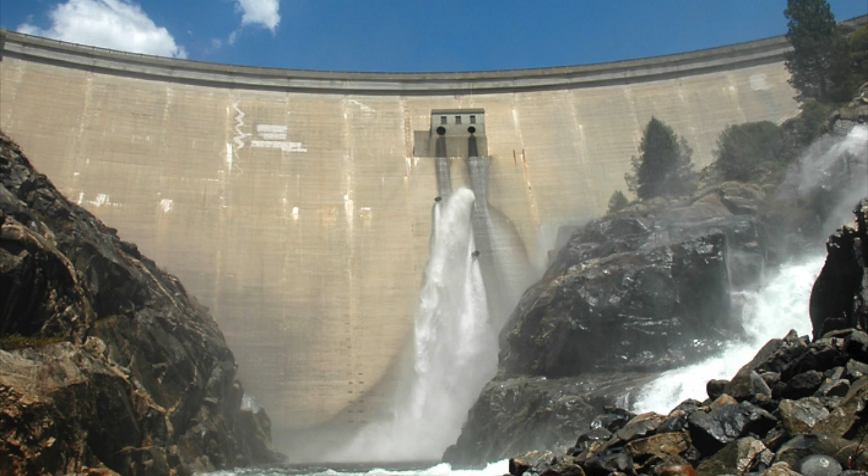Fun thing about being a civil environmental engineer, specializing in water, is that each day is unique. My typical day involves working on projects for towns and cities that hire us to help run their water and wastewater systems. This means that most days usually fall into one of four roles based on project work.

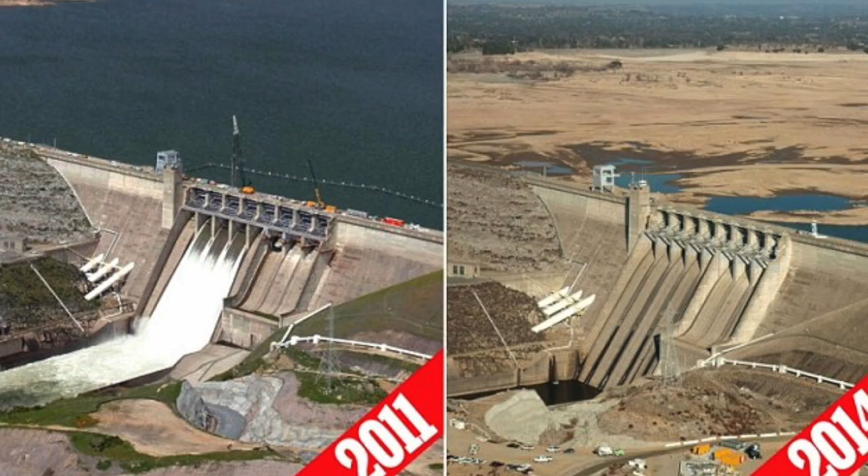Some days, I may be working in the infancy stage of a project, doing high-level planning calculations and conceptual designs. This is fun because you get to be creative and let your mind run free solving real-world problems.

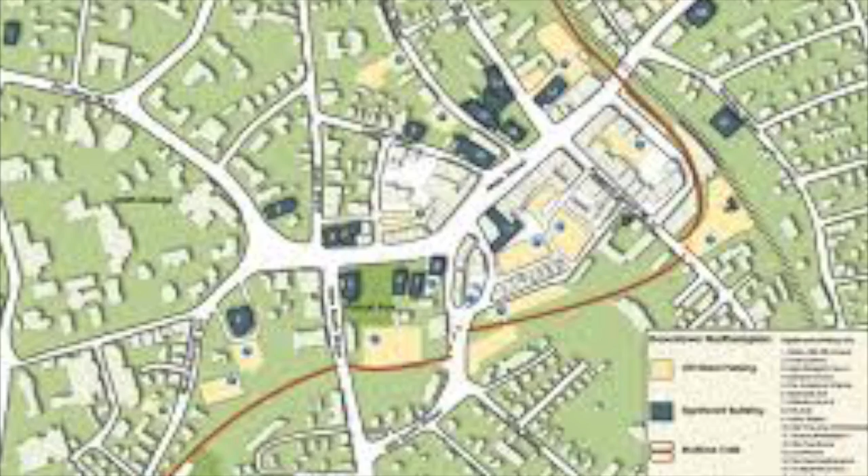Other days, I may be completing final designs with tools such as AutoCAD and GIS. I really enjoy maps and drawing technical plans, so I kind of feel like a kid in a sandbox doing this kind of work. Once your project design is complete and goes out to bid, a water engineer helps administer the bidding process. This is really a separate phase of the project lifecycle, but only lasts a few weeks, so I've included it with the final design role.

During this part of a project, I'm typically answering questions to clarify design details and getting ready for construction to start. The construction phase of the project is my favorite part of the job.

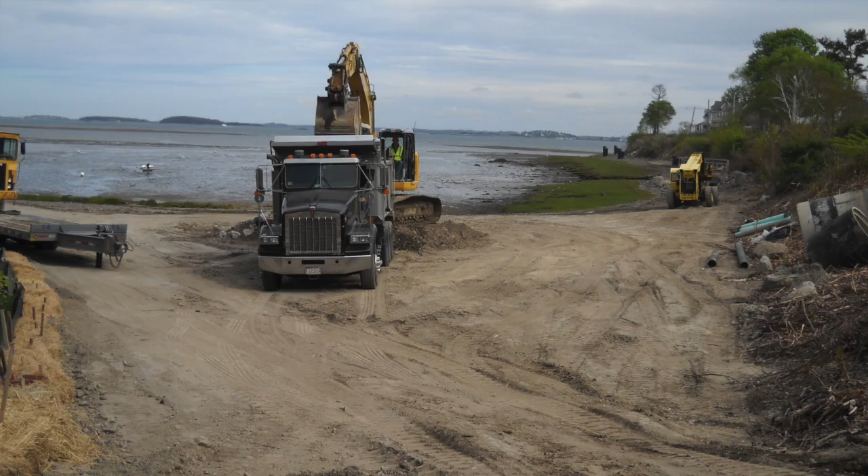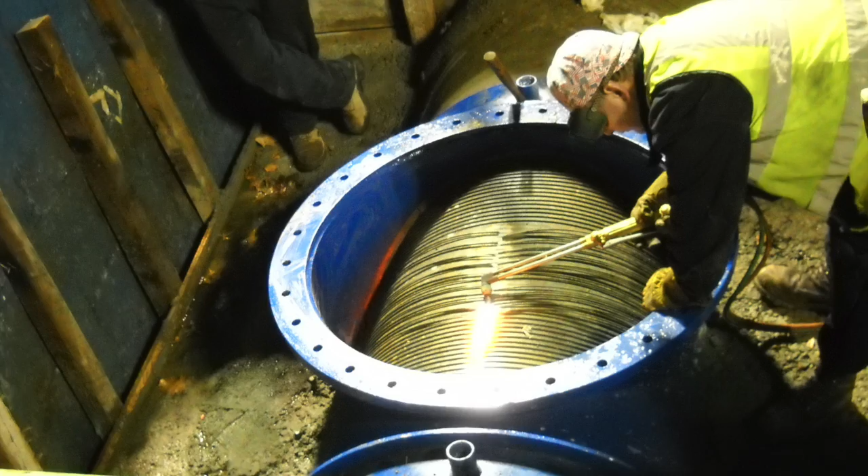You get to see your ideas and designs turn into reality, and it's nice to see your hard work pay off. During this phase, a water engineer usually takes on more of an oversight role and spends days in the field observing construction activities. This is necessary to make sure his or her design is completed as expected.

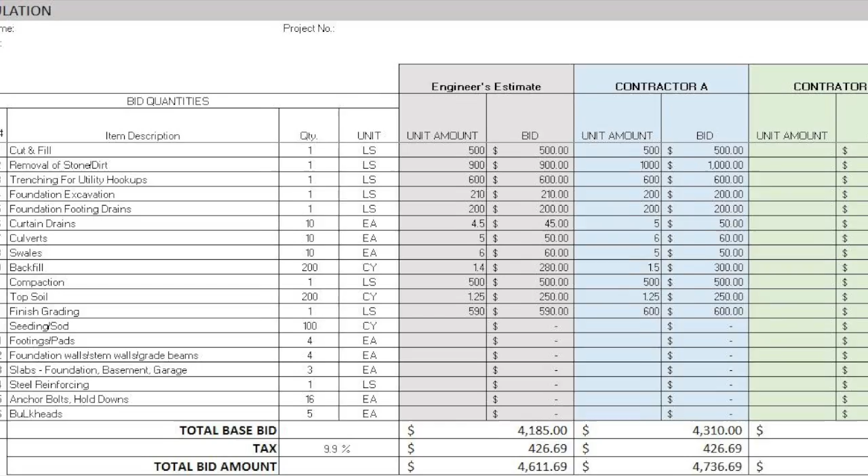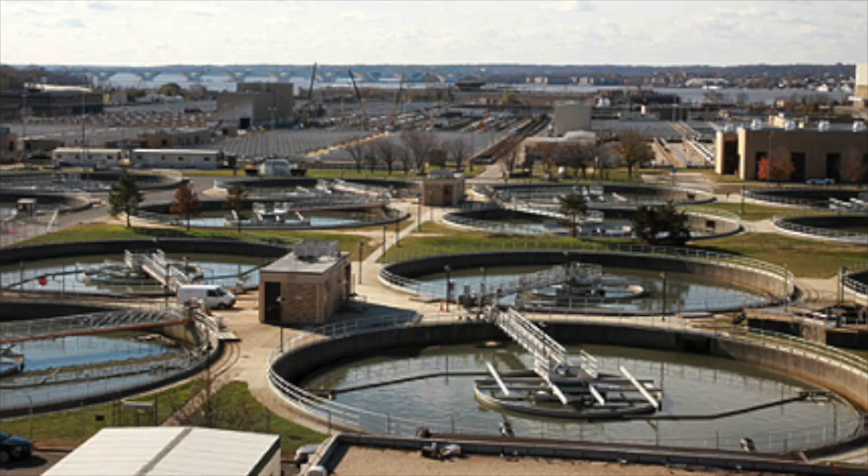Other days, I may be in the office reviewing contractor schedules and product submittals for use in construction. And yet on other days, I may meet with the client to ensure the project is progressing as expected. Construction is usually the busiest part of a project, with a number of moving pieces and important stakeholders involved. I enjoy that responsibility, so that's one of the reasons this phase is most enjoyable.

Now, depending on the size of the company you end up at, these roles and responsibilities may be spread across more or fewer engineers. I enjoy my work because you get a good mix of experience in the office and in the field.

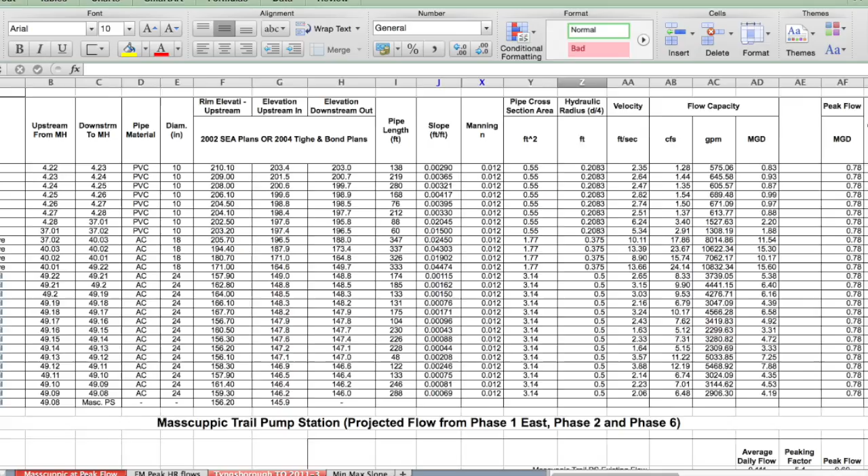I started my career working on analyses of flow data in Excel and other software programs that would eventually result in construction repair projects. Eventually, I was able to get out in the field to oversee the construction of these projects.

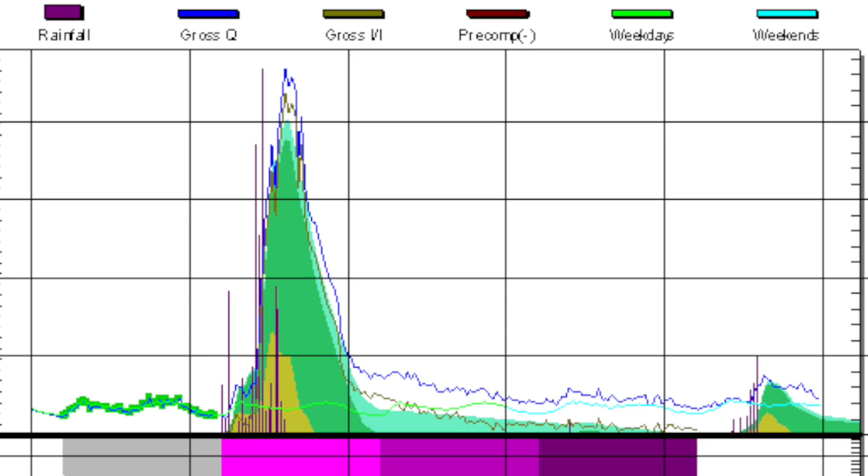And as my career advanced, I've become more responsible for overall project outcomes, have been in direct contact with a number of clients, and have begun helping to grow the business with efforts in marketing and representing my company at recruiting events.

I hope this has been a good review of what it's like to spend a day as a water engineer. If you have any questions, please leave them in the comments below.